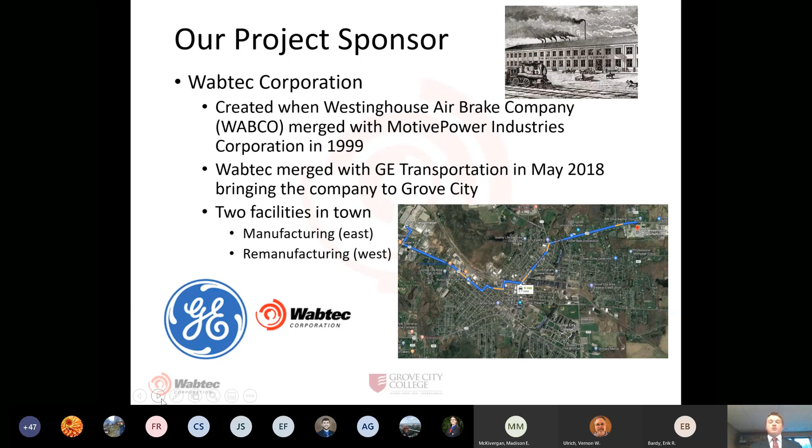That gear can be salvaged and reused, saving Wabtec money. The gear is press fit onto the shaft, and it has some special characteristics that we'll get into later, but just know that it makes it extremely difficult to remove that gear from the crankshaft. So this is where we come in.

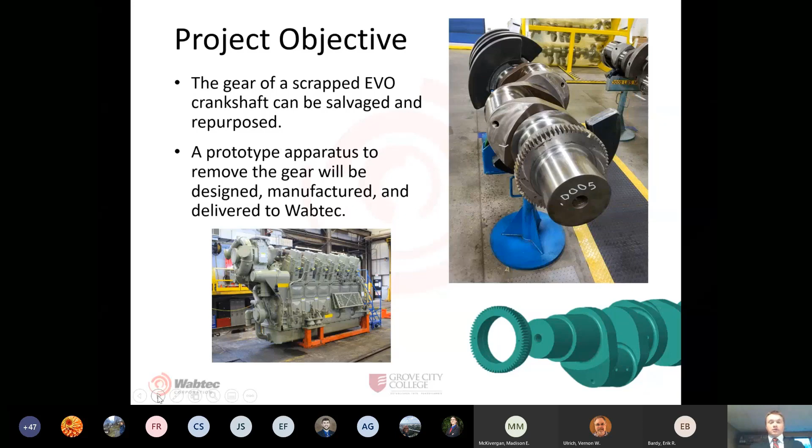A prototype apparatus is to be designed, manufactured, and delivered to Wabtec. Wabtec gave us certain design requirements to meet. The two most important ones are the successful recovery of 80% of the gears and a maximum of 30 minutes touch time for removal. Those are the most important requirements - critical to quality.

They also gave us 4 other soft requirements. One is the ability and versatility to use on broken crankshafts, which come in all different conditions, so that versatility to use on whatever they may receive in the remanufacturing plant is important. The ability to remove the gear without damaging the crank. They wanted to avoid the need for a larger hydraulic pump because they already have one on their shop floor, so they wanted us to tailor our design to said pump, and also keep a tool replacement cost under $10,000.

It actually floats, they call it, and can move axially on the shaft and rotate 360 degrees. That allows them, whenever they install it, to line it up perfectly because, like I said before, it drives some really important stuff on their engine.

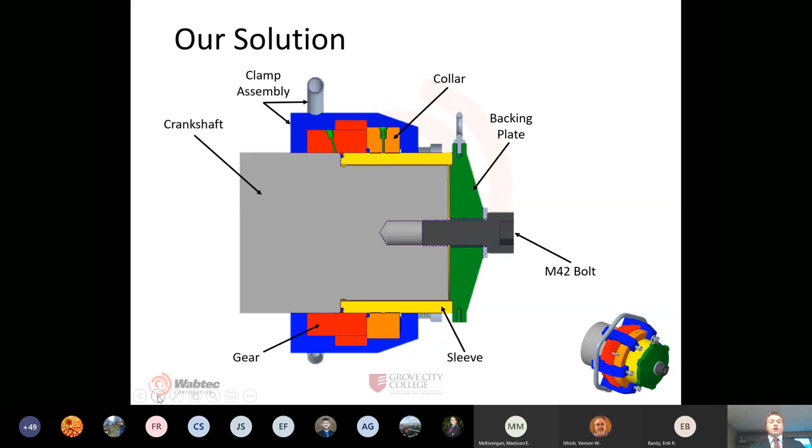The blue piece is the clamp assembly, and that is designed to keep all that hydraulic pressure in. There's a lot of pressure involved, as you'll learn later, so it was very important that this was a robust design of ours. Once hydraulic pressure is applied to the gear and collar, it slides onto the sleeve, which is the yellow piece that you see there. And I'll pass it off to Sam Briney to tell you more about the sleeve.

All right, so a lot of my responsibility on this project had to do with design of the sleeve, which is the yellow component you see there. The purpose of the sleeve in the design was to minimize the cross-sectional area associated with the hydraulic fluid.

So you can imagine if we took the sleeve out of the design and just had the orange collar extending all the way down to the smaller diameter of the shaft instead of up to the sleeve, you would have hydraulic fluid filling the cavity where the sleeve now sits. This would create an axial force produced by the 10,000 pounds per square inch of hydraulic fluid, creating an axial force on the entire apparatus of about 200,000 pounds. This force would be much too large for our design to handle and would cause very, very high stresses.

So to combat that, we put the sleeve in the design. You can see the blue O-ring on the left edge of the yellow sleeve seals the hydraulic fluid so that it only goes on the top surface of the sleeve, therefore drastically reducing the axial cross-sectional area on the sleeve.

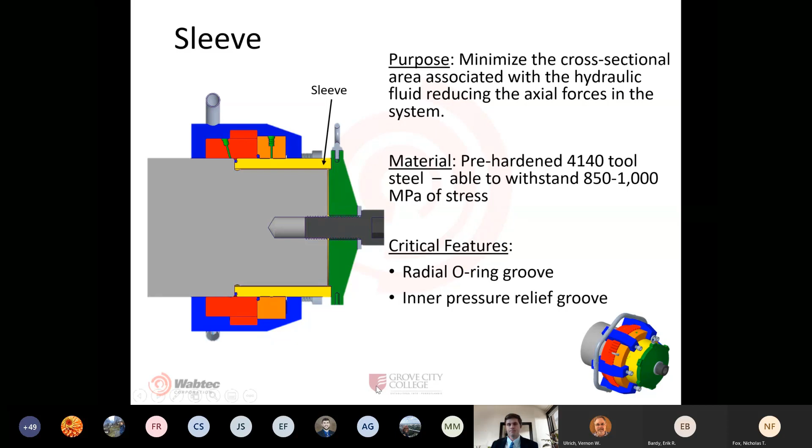These hydraulic relief grooves are a safety feature. If our O-ring fails, hydraulic fluid will merely leak through the inner diameter of the sleeve instead of creating a large axial force. Furthermore, this leakage will allow the operator to visibly see that there's been a failure in the O-ring so they can do the proper maintenance on the tool.

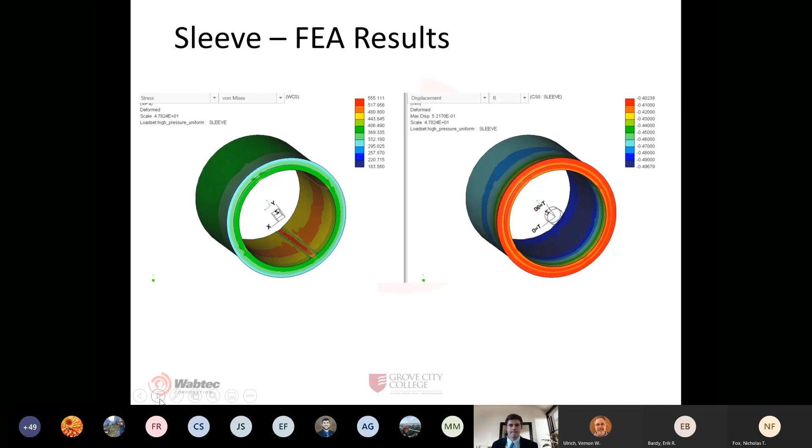So you have the gear and the crankshaft and the collar and the sleeve with the same pressure so that they can float off simultaneously while attached to the same pump.

If the collar ID or OD was too large, this would decrease our tolerances by increasing the stiffness and decreasing the displacements. And if we made the collar too thin, that would increase our stress significantly. So we picked a happy medium, and that's how we designed the fit between the sleeve and the collar.

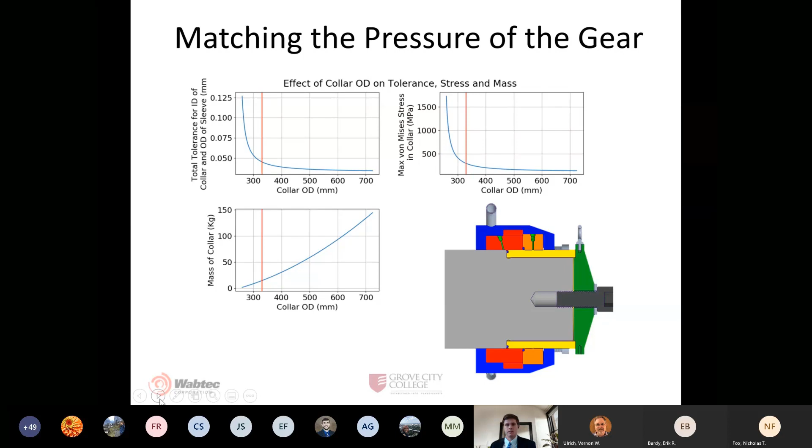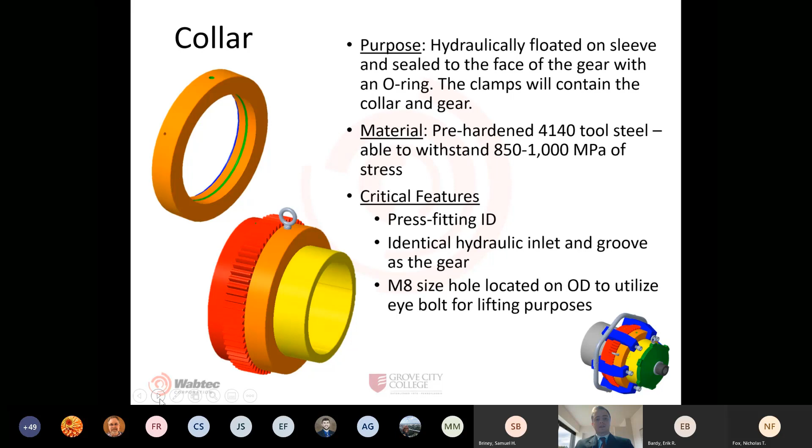In terms of material, the collar will have very high stresses, similar to the sleeve, so it will be made out of the same 4140 steel that the sleeve was made out of, again with an estimated yield strength of 850 megapascals.

When setting up analysis for the collar, a 10,000 psi pressure load was applied to the inner diameter, which simulates the pressure of the hydraulic fluid. In addition, the total axial load caused by the clamp bolts is 60,000 pounds, which equates to around 10,000 pounds per bolt surface region. The surface region size has the diameter of the end of an M18 bolt, which is what is being used for the clamps.

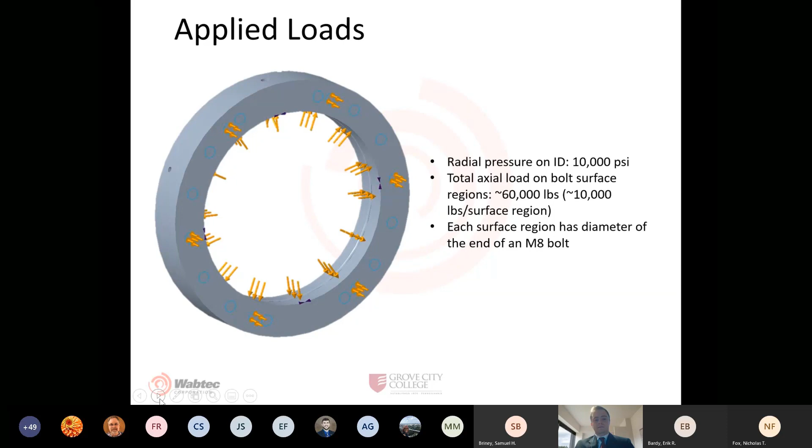So this is our finite element analysis summary of the collar. The highest stress occurs in the hydraulic inlet hole at around 691 megapascals, which is about 160 lower than the allowable 850 before the collar begins to yield. All other stresses in the critical areas fall well below the allowable stress.

Also shown here is the axial bolt displacement and the radial displacement. These values are acceptable and small enough so that they don't raise concerns for functionality.

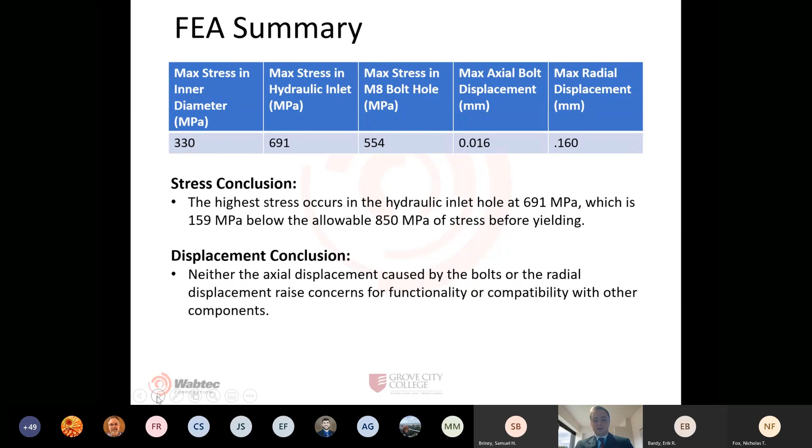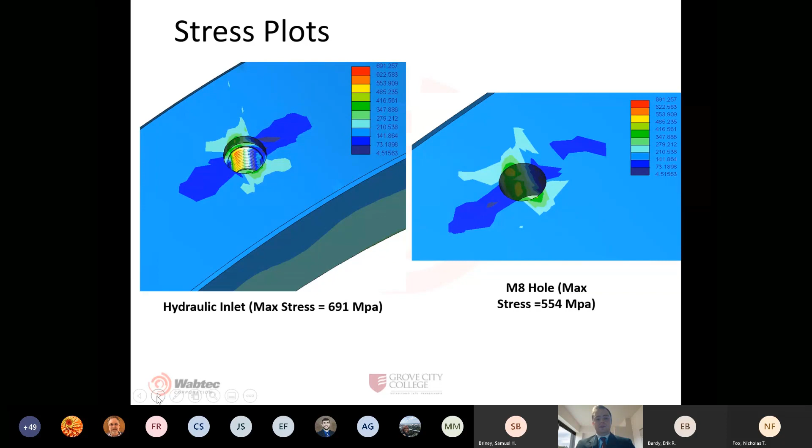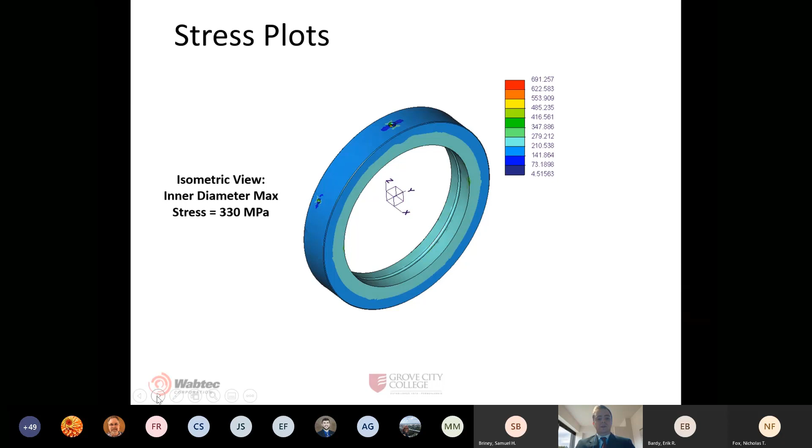So these are the stress plots for the collar. On the left, you'll see the hydraulic inlet. The red shows the highest stress occurs, which is around 691 megapascals. To the right is the second highest stress in critical areas, which is the M8 hole, used for lifting. This plot shows the stress on the inner diameter, which is the lowest stress in terms of critical areas, at around 330 megapascals.

Here are the displacement plots for the collar. The axial bolt displacement plot is shown to the left, visually seen by the 6 circular surface regions on the plot. The radial displacement plot is shown to the right, showing displacement in the vertical direction. Now Kyle will take over and talk about the backing plate.

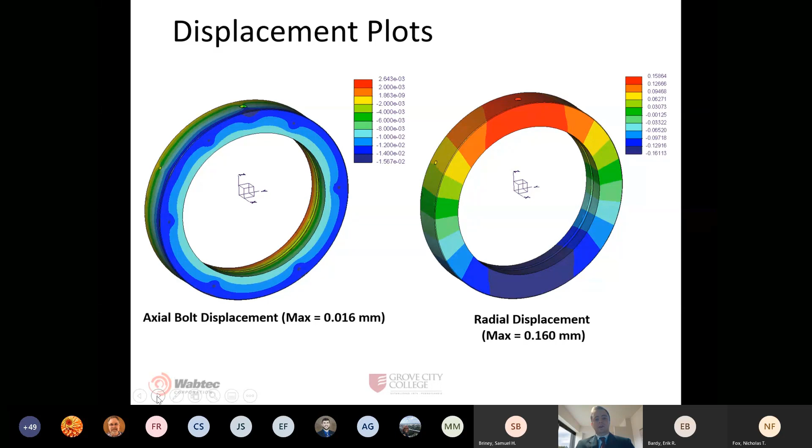Hello, I'm Kyle Smith, and I'll be talking about the design and analysis of the backing plate. The purpose of the backing plate is to hold the sleeve in place, as well as maintain the sleeve face seal. For the sleeve face seal to maintain proper compression, the backing plate must not have an axial deflection greater than 0.26 millimeters.

The backing plate is secured to the assembly by the M42x3 bolt. These components can be seen in the figures at the bottom of the screen. The backing plate is made from A514 tool steel that has a yield strength of 700 megapascals. A force of 58,700 pounds is applied to the backing plate during the removal process, and this force is the result of the hydraulic pressure acting on those sleeve surfaces that are above the seal.

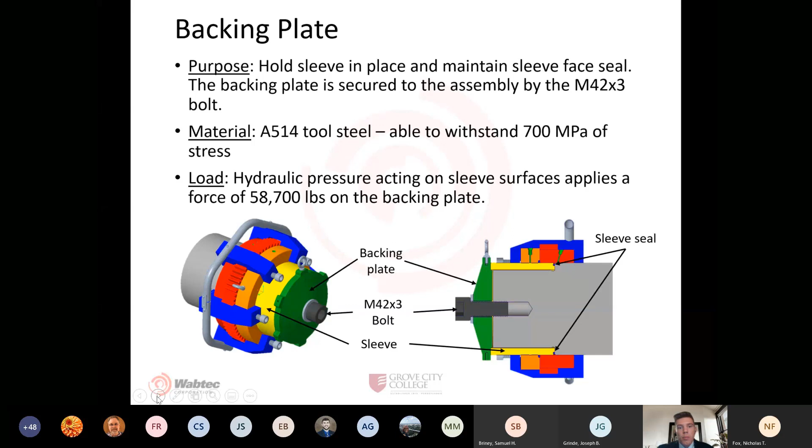Next slide. The final backing plate design features a clearance hole at the center for the M42 bolt. It is also 50.8 millimeters thick and is tapered down to 21.4 millimeters at the sleeve contact surface. The design has 6 tabs that are equally spaced 60 degrees around the edge of the plate.

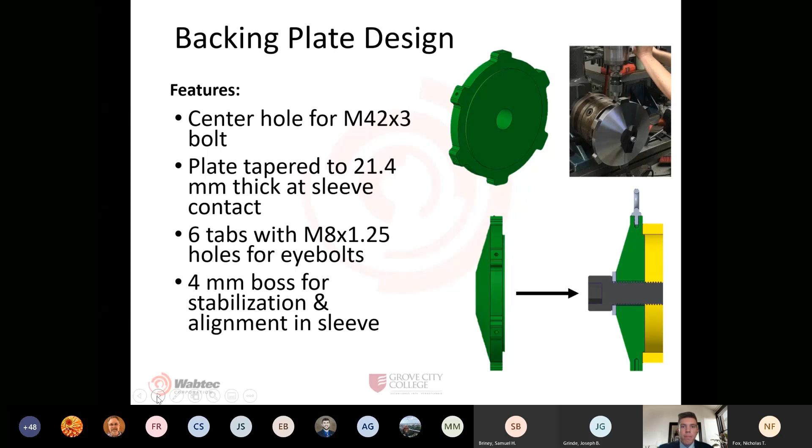These tabs all have an M8 hole that allows for the installation of eye bolts. The eye bolts give Wabtec the option of using a crane during the attachment process to the assembly, if that is desired. The backing plate also has a 4 millimeter boss for stabilization and alignment into the sleeve, which can be seen at the bottom right figure there. Next slide, please.

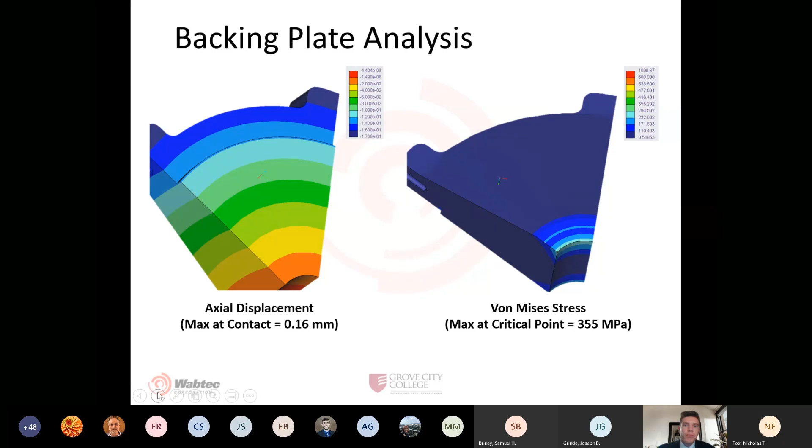Now I'm going to pass it off to Jake to talk about the clamps.

Hi, I'm Jake Wright, and I've done a lot of work with clamps this year. One of the main challenges we faced with using the collar to maintain float pressure on the gear was preventing the collar and the gear from being forced apart when hydraulic pressure is applied. To handle this, the team decided to develop a clamp system that will hold the collar and the gear together. We determined that the best clamps needed to provide sufficient clamping force, be lightweight so they could be handled easily, and be quick and easy to use to minimize error and touch time.

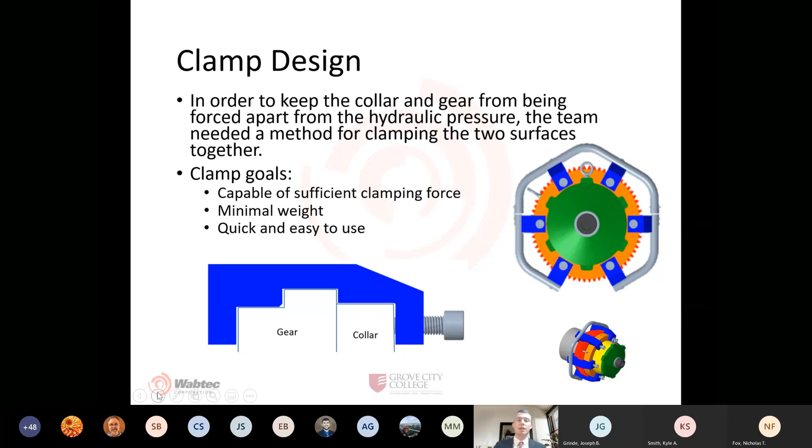We found that the hydraulic fluid exerts a total of approximately 58,520 pounds of separating force between the collar and the gear. Our use of 6 evenly distributed clamps results in about 9,700 pounds of clamp force each. Performing finite element analysis on the clamps, we saw that the final clamp geometry had a maximum stress of only about 245 megapascals. This was also seen in sharp modeled corners that don't actually exist when the part is manufactured, so the actual maximum stress may be slightly smaller.

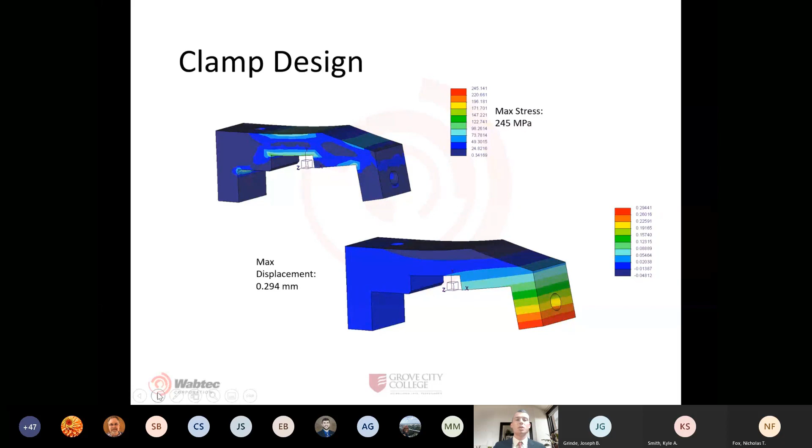The side handles have a tab which will fit over those screws on the top handle. These handles allow operators to mount the top two clamps and then proceed to hang the two side handles from the top and swing the clamps into place. This feature allows for faster assembly time as well as guarantees an even 60-degree spacing between the clamps, and also gives the operator something to hold on to when guiding the gear off of the shaft.

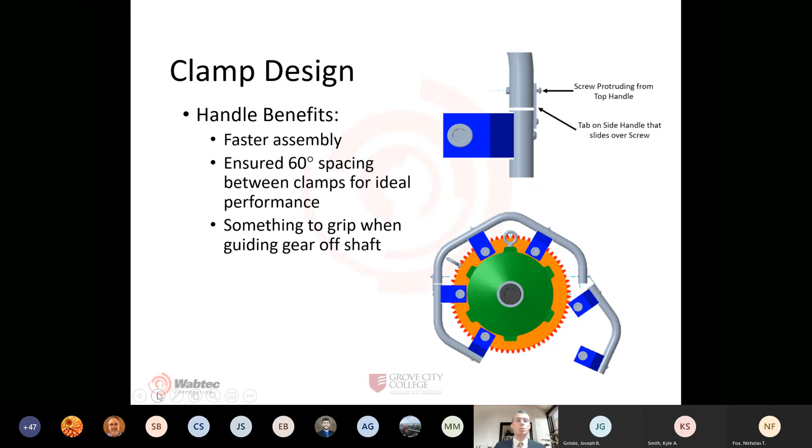At this point, I will hand things off to Matt to discuss the hydraulic setup.

Thank you, Jake. I will be talking about the hose assembly as well as the removal process. After designing the collar and keeping in mind that we wanted to use the same pump that Wabtec provided to us, we needed a design that would handle both the gear and the collar. So we came up with this design and sent it out, and we heard back from a company who spec'd this for us. What we wanted was a valve on each side so we could independently or simultaneously float the gear and the collar. We also wanted six feet of hose on each side just for easy use.

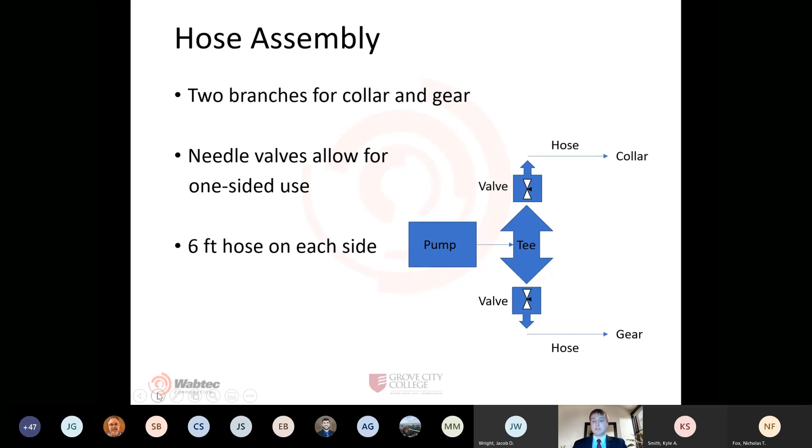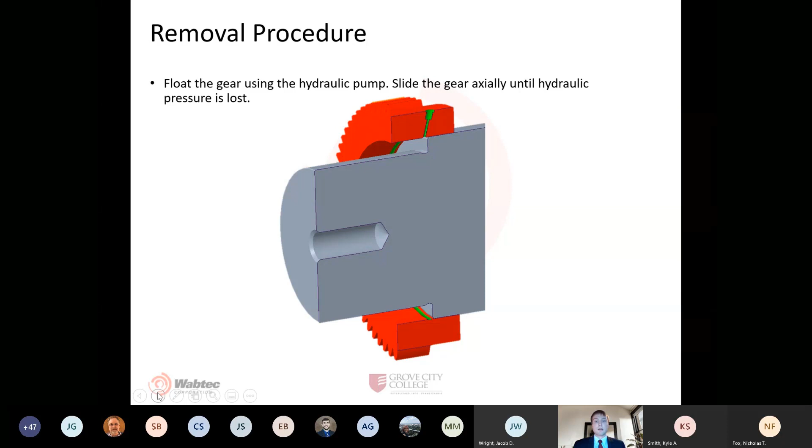So the first step of the removal procedure is to float the gear using the hydraulic pump, and you're going to slide the gear axially until pressure is lost. You're then going to slide the sleeve and the collar combination onto the smaller end of the crankshaft, and you're going to ensure that the O-rings, which are seen in blue, are fitted properly.

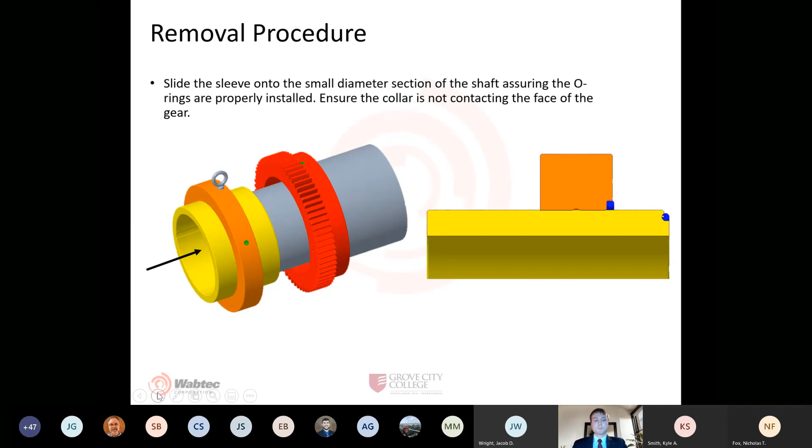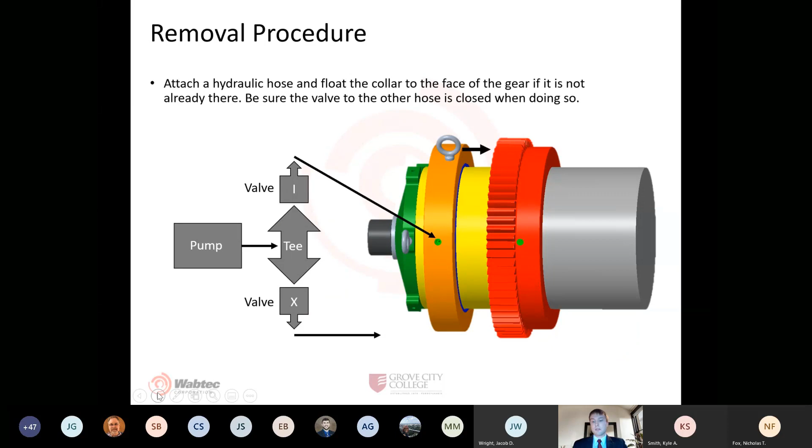You're then going to attach the backing plate using the M42 bolt and tighten. You're then going to apply the other side of the pump to the collar and float the collar to the gear. You're then going to install the clamps, and then you're going to float both.

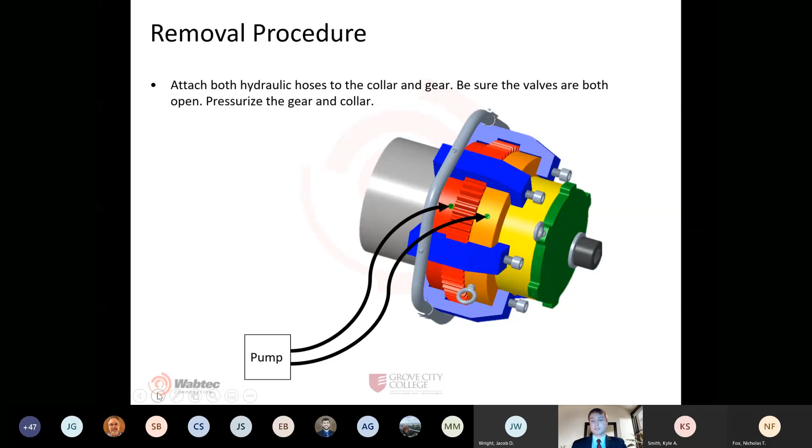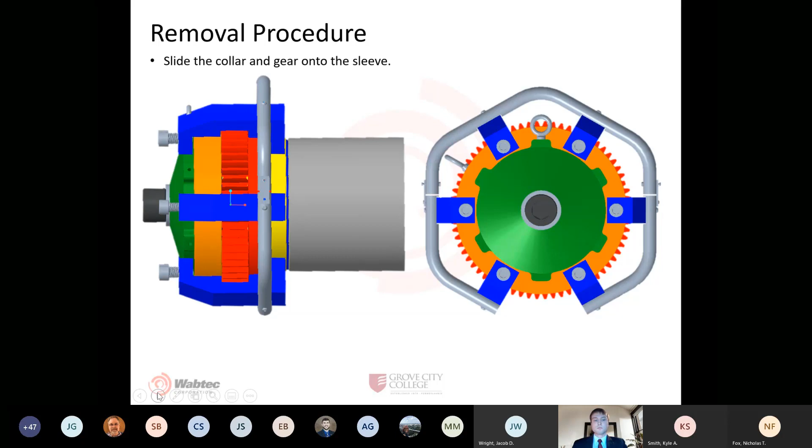You're going to apply hydraulic pressure to the collar and the gear. You're then going to slide the collar and the gear combination down to the end of the crankshaft, noticing that there is clearance between the clamp handles and the backing plate. You're then going to depressurize the collar and the gear, and you're going to remove the backing plate.

This next step is up to Wabtec. It depends on what is easiest for them. The first option is to carry the whole assembly away via crane and put it on a workstation such as a moving cart, or you could remove the clamps and float and take away the sleeve and the collar and allow the gear to slide onto the smaller portion of the crankshaft.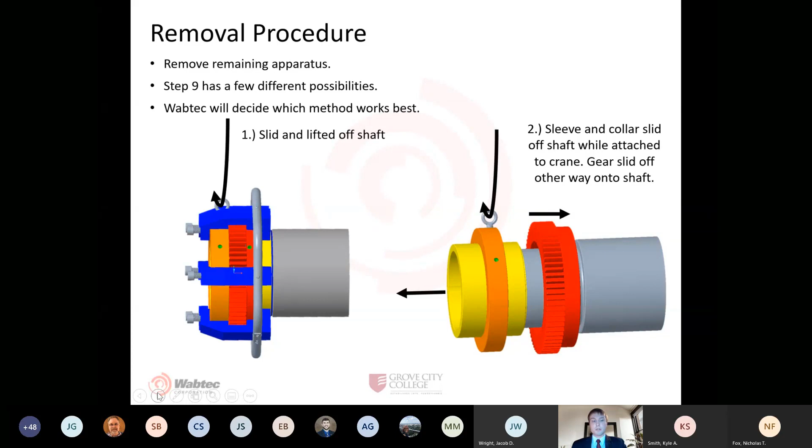And now I will hand it off to Alex to talk about the testing plan and finances.

Hello everyone, my name is Alex Traxel, and like Matt said, I'll be talking about our testing plan. Unfortunately, we weren't actually able to conduct our testing plan due to the coronavirus pandemic that affected the end of our semester plans. However, we still had a plan that we were going to put into place if we were able to actually be on campus and test our apparatus.

So once we were confident, we were then going to take the apparatus to Wabtec and try to remove 10 or more gears at their facility in Grove City. Our goal of removing 10 gears was to see if we can meet the 80% success rate that we established with Wabtec as a good passing criteria for our project.

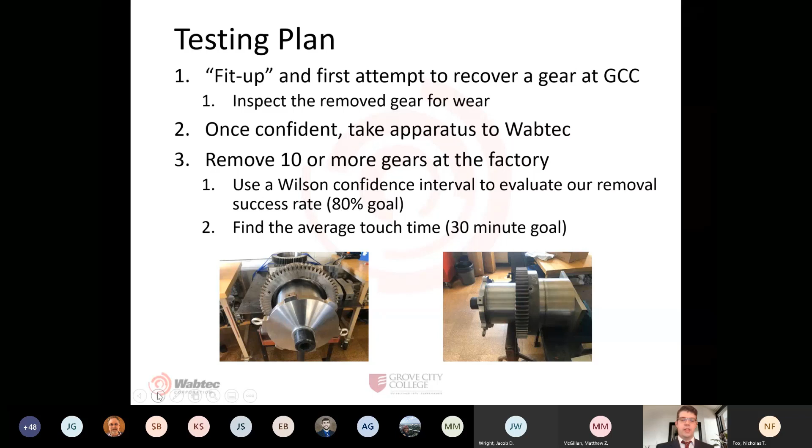So next, we're going to talk about some finances of our project. Thankfully, due to Wabtec sponsoring this project, we had a generous $10,000 budget. Of that, we had $8,000 controlled by the team to purchase components, as well as to fund manufacturing and outsource components if we needed them produced by outside vendors. Additionally, the other $2,000 was controlled by Wabtec, so that they could purchase components for us, such as gears, and fund providing us the shaft, as well as any other tooling we may need for testing.

So overall, we only spent $4,371 of that team-controlled $8,000, which was only 54.6% of our team-controlled budget. However, it's important to note that those spent funds do not include any student labor or any expenses incurred manufacturing the components in the Grove City College machine shop. So real-world costs will be above that, because we had access to some free things that helped keep our costs low.

So on this next slide, we're going to look at a Pareto graph and a sensitivity graph. These show the breakdown of our spending into 10 major spending categories. One glaring observation is that the sleeve and the collar accounted for around 64% of our spending. This is because they were the two outsourced components of this project, produced for us by Brilics Industries. These were outsourced due to their large size, critical tight tolerancing, as well as their demanding heat treating. Beyond those two components, the remaining 8 all were under 10% of the total spending, because we were able to manufacture those in-house, and they're much simpler and didn't require as much tolerancing.

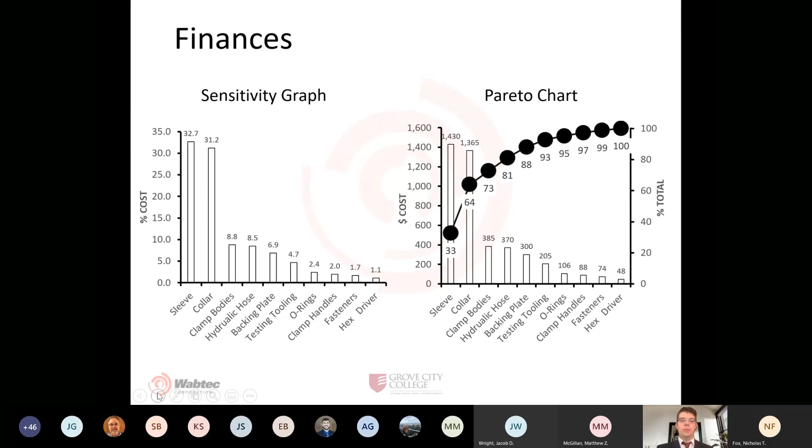So next, we're going to move on to review some of the design requirements that Nick shared with us. We're going to reflect to see how this project meets those, and if we're confident in the results that we have without testing.

Our first two critical to quality requirements—successfully recovering 80% of gears, as well as being under the maximum half-hour touch time requirement—we're currently unsure if we meet, because we were unable to actually take our apparatus to Wabtec and try to remove gears.

Additionally, we are confident in some of our soft requirements that we will exceed. First, with being able to use the apparatus on a broken crankshaft, we're very confident we're able to do so, because we designed all of our components into what we identified as a critical radius. That meant those components can be assembled without touching the ground if a broken crankshaft was sitting on the ground, since it couldn't be mounted to engine stands.

Additionally, we're currently unsure if we'd be able to remove the gear without damaging the crank, again due to our lack of testing. We wish we were able to test the apparatus to see if it would cause damage, but at this time we're unsure. However, we are confident that we don't need a larger hydraulic pump to use our project, because of that custom hose assembly that Matt talked about earlier.

Finally, we're very confident the total replacement cost for our apparatus would be under $10,000, because we outsourced our two major components and still came well under our budget. Even though we had some beneficial free labor and help in the machine shop, if Wabtec had to do this project over again, we're confident that with the extra budget we did not spend, they would be able to outsource those as well and still come out with an apparatus under $10,000.

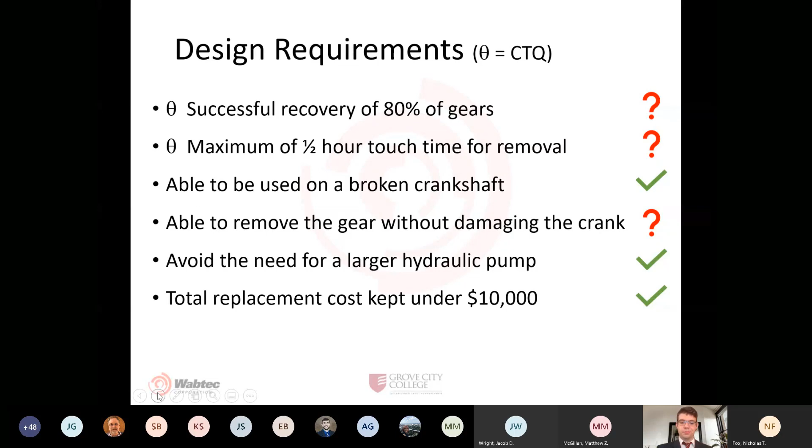In conclusion, we first want to give special thanks to many people who were very helpful in this project. We first want to thank Justin Fowler, because he was our day-to-day contact at Wabtec, and without him none of this project would be possible. Additionally, he's a Grove City College alumni, and we know he was instrumental in getting this project started, so we want to thank him for giving us this opportunity.